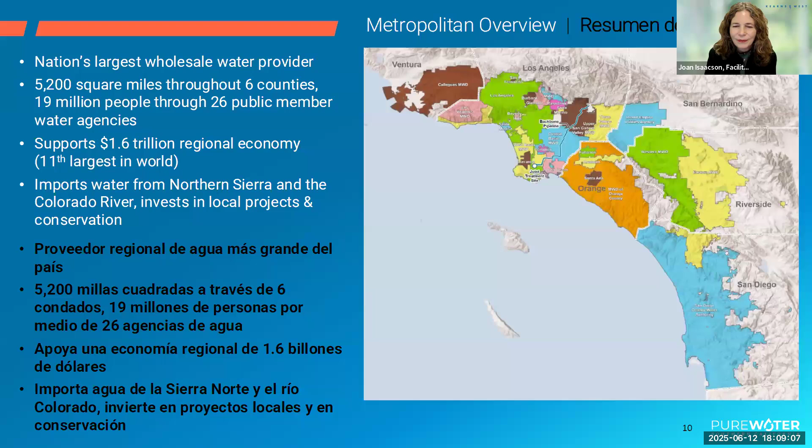All right, John, I think I've gone through all the preliminaries, over to you to start the presentation. Thank you, Joan, for those introductions. Good evening, everyone. On behalf of Metropolitan Water District and the Sanitation Districts of Los Angeles County, I'd like to welcome you to this virtual public meeting for the Pure Water Environmental Impact Report.

This is our second public meeting. We'll be having one more virtual meeting this coming Saturday. Derek and I are going to start by giving you a little bit of an overview of each of our organizations. Metropolitan Water District is the nation's largest wholesale water provider.

What does it mean to be a wholesale water provider? Metropolitan does not sell water to individual customers. We have 26 customers, which are our member agencies. Those member agencies then distribute water to approximately 19 million people in Southern California, ranging from Ventura in the north down to San Diego in the south, from the Pacific Ocean on the west out to the Riverside and San Bernardino area on the east.

We're supporting a very large economy in Southern California. Some of you may be aware that Southern California has the world's 11th largest economy, so it's a very important economy that depends greatly on not only Metropolitan Water District but our 26 member agencies to do their job every day to bring water into this region.

Our mission to date: we were formed in 1928, originally to import water from the Colorado River. Then in the 1970s, we supported the State Water Project and the state of California by taking deliveries from the State Water Project from Northern California. Over time, we've also invested hundreds of millions of dollars in local projects to support the development of water locally in Southern California. Let's go to the next slide.

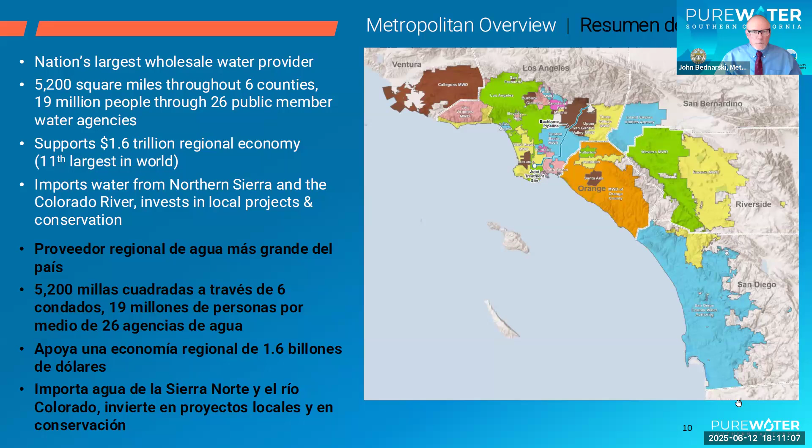As I mentioned, Metropolitan is a wholesale water provider. We own and operate the Colorado River Aqueduct, approximately 240 miles long, from the Colorado River, that was placed in operation in the early 1940s.

That was our core supply until the early 1970s, when the state of California developed what we call the State Water Project, that brings water from Northern California through a 350-mile long aqueduct into the southern portions of the state. Metropolitan is the largest contractor on that system.

We get approximately 30% of our water supply from the State Water Project, approximately 20% from our own Colorado River Aqueduct. And the remaining 50% of our water supply, I'm happy to report, is actually locally sourced.

It's very important to locally source water, and we're very fortunate to have this large abundance of local water supplies. We have very good groundwater basins that we use as large storage reservoirs. Many of our member agencies take deliveries from Metropolitan and store that water in these groundwater basins and produce that water as pumped water later on.

We also rely on snowpack in the local mountains and rainfall to recharge those underground aquifers. San Diego also has a seawater desalination plant that counts as a local supply. So we're very fortunate to have those local supplies.

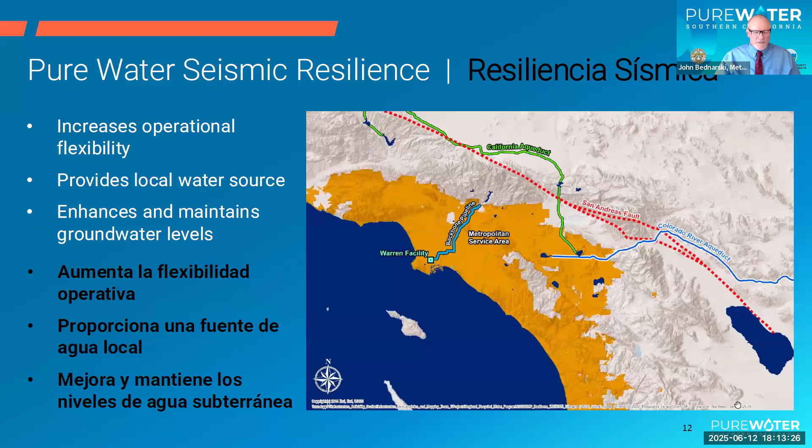I think this program, honestly, is the story of two agencies that have come together with a similar vision to develop a resource that is currently going out to the Pacific Ocean, and in turn produce a water supply that is of high quality and reliable for the region. This is a story of two very large agencies that have historically done their missions very successfully and are now embarking on a very important partnership as we move forward to maximize water recycling in the region.

At this point, I'm going to turn it over to Derek Zondervan to talk about the sanitation districts of Los Angeles County.

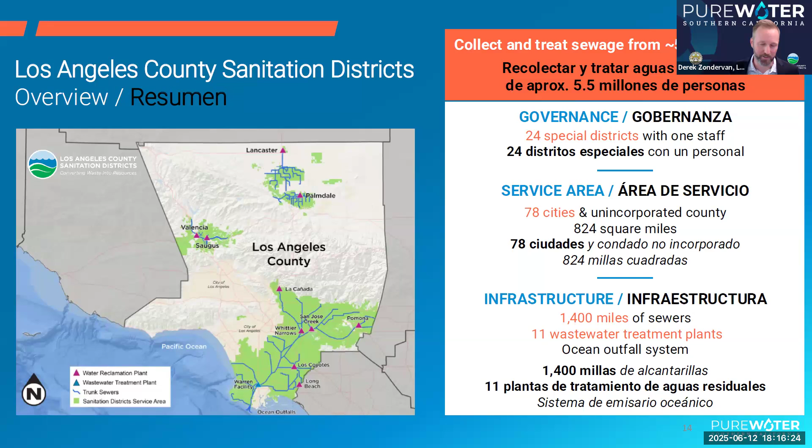But we're hoping to change that with this project, because the site of the proposed Pure Water Southern California Advanced Water Purification Facility is at the Warren facility. So if I could jump to the next slide, please.

Okay, this is an aerial view of our Warren facility, and the treatment plant is outlined in orange. As I mentioned, it's located in the city of Carson, along the east side of the 110 freeway. You can see that in the background there. Sepulveda Boulevard is the closest exit. And this facility currently treats about 250 million gallons per day of wastewater.

Historically, the wastewater of this plant has been too salty for reuse, so we consider this our largest untapped source of clean water for reuse within our system. But now with the Pure Water Southern California treatment facilities, we can finally make use of this very valuable resource. As far as the treatment process, you're going to hear a little bit more about that a few slides from now.

So the proposed location for the advanced water purification facility is outlined in the light blue. That's a 52-acre site that we, the sanitation districts, purchased a few decades ago to act as buffer property for the Warren facility. It provides separation from the treatment facilities and the neighboring community. This is really an ideal location for the advanced purification facility, not only because it's vacant and available, but also it's right next door to the source water at the Warren facility that's going to supply the new treatment facilities.

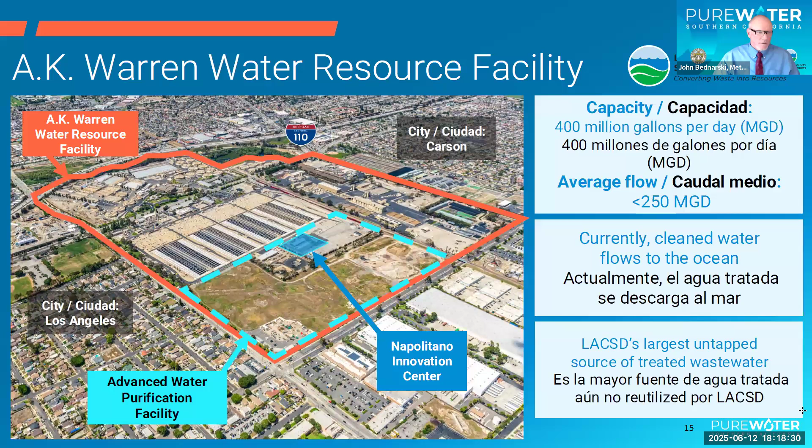Thank you very much, Derek. When it comes to water supply reliability and resiliency in Southern California, the impacts of climate change are very real. There's less snow in the local mountains, less snow in the Sierra Nevada, and less snow in the Rockies. More fires, as has been evidenced by the horrific fires that impacted Southern California earlier this year. And then we're sometimes stricken by dramatic increases in flooding, and the dry years are likely to get more often and also drier.

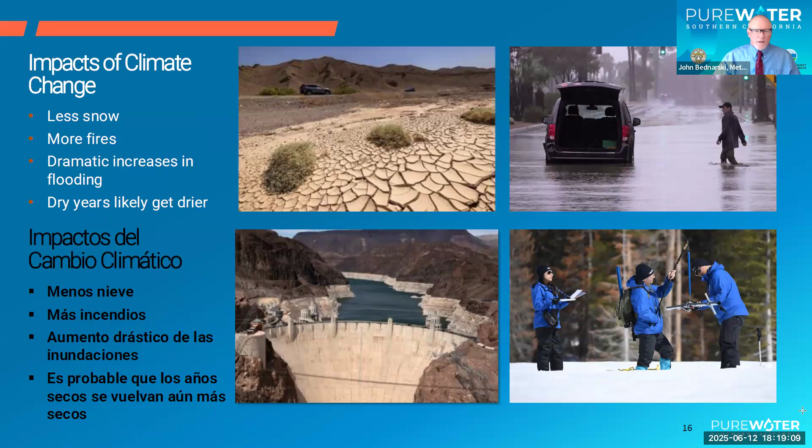So Metropolitan's response to this sort of unsure future going forward as far as water supply is concerned is to develop what we call a climate adaptation master plan for water. This is a plan that has been recently approved by our board of directors with two primary pillars. One is to develop a vision and a plan for ensuring water supply reliability. The second pillar is to develop a plan to ensure financial stability and sustainability for Metropolitan as an organization as we move forward through these challenging times.

As far as water supply reliability, this is where the Pure Water program fits in, in order to give us a drought-proof supply of water going into the future. But we need to make sure as we're making these investments that we're able to maintain affordable water rates, that we're making sound investments, not building infrastructure that will ultimately become stranded and not used, looking for opportunities to do project cost sharing with project partners, and also establishing regional partnerships like the one that you've heard about between Metropolitan and the sanitation districts.

Additional goals of the Climate Adaptation Master Plan for Water include increasing the resiliency and the reliability of the water supply for Southern California, increasing the amount of local supplies that are used and being able to lessen our reliance on imported water supplies, providing greater flexibility of our delivery systems to move water from one location to another that was never envisioned by the original designers and builders of Metropolitan's system. And, like I mentioned on the previous slide, ensuring that there's equitable access to affordable water for all people. So taking cost into consideration as we develop this new program is of paramount importance to the project team and to both of our organizations.

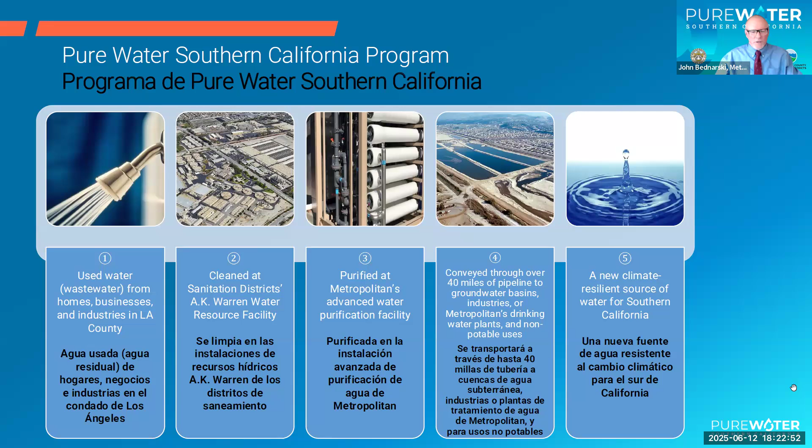The water will then be conveyed to its ultimate destination, and this conveyance system will include approximately 40 miles of pipelines, pump stations, groundwater spreading facilities, as it makes its way either to industries, groundwater replenishment uses, or perhaps as we fully build out the system into Metropolitan's own water treatment plants for retreatment and then distribution into our existing potable water or drinking water system. It's going to be a new climate resilient supply for Southern California, as I've mentioned a couple times before.

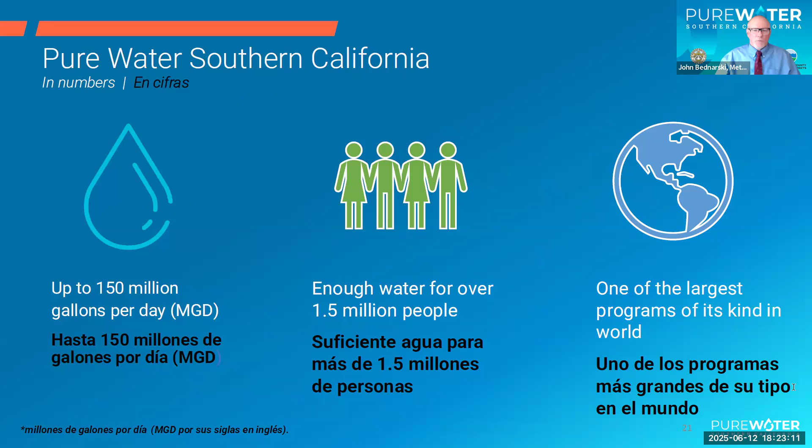As described in the environmental document that's available to all of you, the maximum build out of this project is 150 million gallons per day. It will be one of the largest projects of its kind in the world and will provide enough water for 1.5 million people within Southern California.

Let's talk about some of the benefits of the program, and we've really broken these up into three different tiers. One is the water supply benefit. It's a sustainable supply of water, whether we're in drought conditions or had a bountiful winter of snow that's run off and been collected into our aqueducts. This water will be available 24/7, 365 days a year. It will thereby increase water resiliency to Southern California, allow us to replenish groundwater basins, and as I've said before, will create a new local supply of water.

There's also environmental benefits from this program. This purified source will enhance water quality, especially in the groundwater basins, as it's used as a source to replenish those basins. We'll be using the largest untapped source of wastewater in the region. Other projects similar to this are currently in the planning or development stage, and they will also be coming online in the not too distant future. But collectively together, this program will allow us, Metropolitan, to reduce its reliance on imported supplies.

Finally, there's economic benefits from this program, and I'll go into some of the details in future slides, but suffice to say, this $8 billion program will fuel economic growth and will also generate jobs, not only during construction, but long-term operational jobs, both at Metropolitan and at the county sanitation districts.

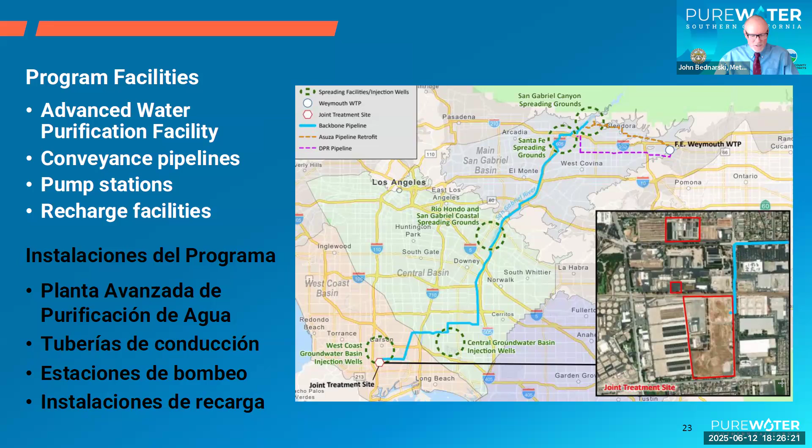Pure water provides additional benefits to the region, but these are not specifically quantified in the programmatic EIR. They are covered, but not quantified. Some of those additional and supplemental programs benefiting from the Pure Water program include Metropolitan's Climate Action Plan, the Climate Adaptation Master Plan, the goal to develop sustainable infrastructure, providing community benefits and improvements to the region and in the neighborhood of the facilities that are going to be built.

Let's talk about the workforce development initiatives that Metropolitan is including with this program. First is an important project labor agreement adopted by Metropolitan's board several years ago. At the time this agreement was negotiated with the labor unions, it was agreed to include all aspects of the Pure Water program within it. This project labor agreement will ensure that wages paid to all construction workers on this program are prevailing wage levels, and that there will be use of local labor force and development of apprenticeship opportunities.

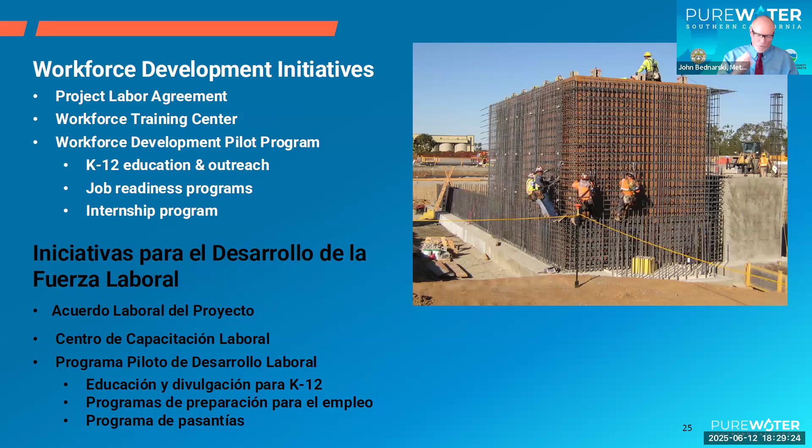Metropolitan recognizes the importance of developing outreach to our communities. It's through community support that we will get acceptance of this program as we design, construct, and operate it. Metropolitan is continuously conducting tours, presentations, and other types of events to draw the public in and teach them about the importance of this program and the benefits of purified water for this region. This information is available on Metropolitan's website, through our social media channels, occasionally in the news, and in all the different multilingual materials being produced. I would direct you to Metropolitan's website for easy access to a lot of these tools.

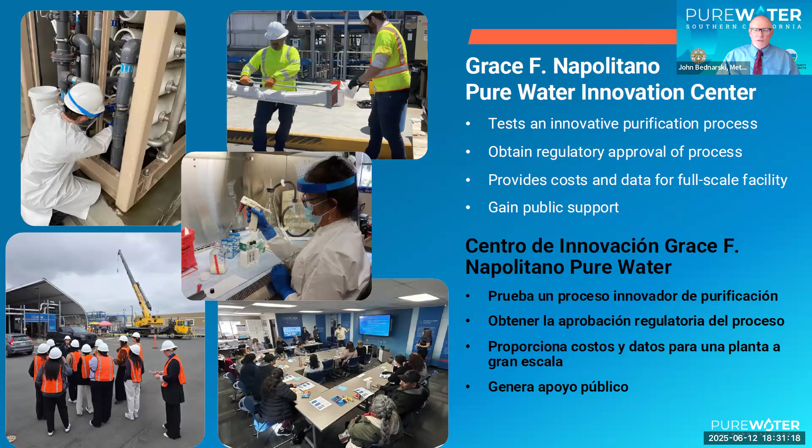The program's development took place on a solid foundation of applied science and engineering, starting with the development of the Grace Napolitano Pure Water Innovation Center. This represents approximately $20 million investment by Metropolitan and the sanitation districts to bring this testing facility online in 2019. At this location, both organizations are able to test the innovative purification process planned for the Pure Water program. We're using it as a platform to obtain the regulatory approvals necessary to operate the treatment process that will produce the water. We're also getting important information from the testing ongoing now as far as the cost for the full-scale program. Finally, we're using this facility to gain public support by conducting countless tours through the facility.

When we embarked upon this program in the mid-2000s, there wasn't a lot of science that existed in the area for the treatment processes we envisioned. So we first looked outward, going to Australia, building upon research done there on the type of treatment process we were envisioning. But then we did a lot of this cutting edge work at the Napolitano Center ourselves over the last 5 to 6 years. Through that process, we've been able to develop confidence in the water treatment process we'll be using to purify the water.

So what are those processes? Let me start first with the AK Warren facility. A number of improvements will be made to that facility, but probably most important is the sanitation districts designing and constructing the first step of the treatment process, or what we refer to as the pre-treatment process for the advanced purification process. This involves introducing membrane bioreactors into the AK Warren treatment facility. A portion of that facility's secondary treatment process will be converted to the membrane bioreactor process to provide enough pre-treated water to go on to Metropolitan's advanced purification facilities.

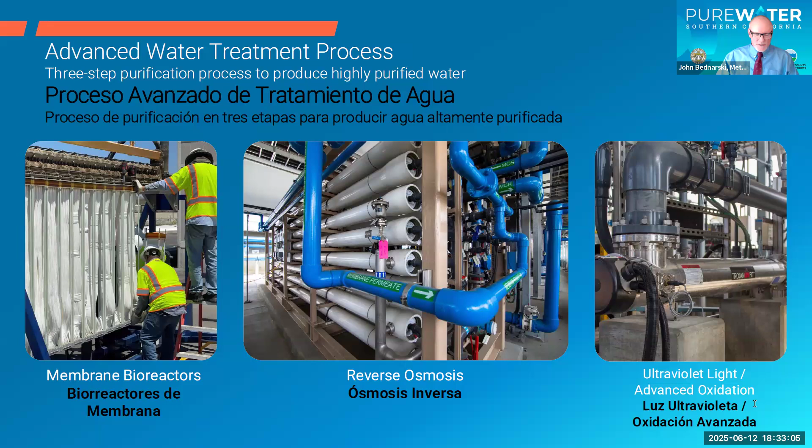A lot of this testing took place at the Napolitano Innovation Center. The key goals of the testing program, beyond pure scientific development, were to allow for transparency of the work we were doing, both for regulators and the general public. We also wanted to use the Napolitano Center to seek feedback on our testing programs, and finally to share the data with the reuse community, the regulators, and the general public.

This testing program has been ongoing for approximately 10 years. While the Napolitano Center has been in operation for about 5 years, it's been testing large scale, or full scale, components of an advanced treatment system. We've had an ongoing arrangement with an independent science advisory panel to advise us on the types of tests we should be doing, how the Napolitano Center was developed, and how to move forward with gaining regulatory approval. We first brought the regulators on board about 10 years ago with our initial meetings to talk to them about the effort we're about to undertake.

We've continued to include regulators throughout the entire process. We feel that we are on track to meet the state's expectations and the regulatory requirements necessary to produce purified water for the uses intended under this program.

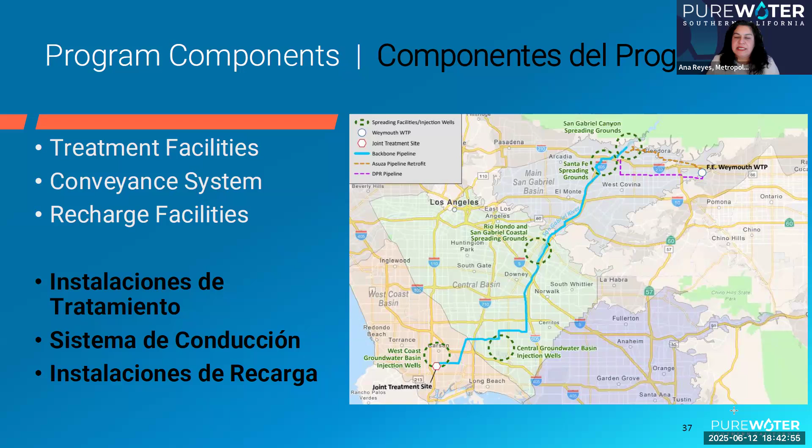Some other topics, like agriculture or forestry resources, were also reviewed, but they were found not to have the potential for significant impacts. Those are covered in a separate chapter of the report called Environmental Effects Found Not to Be Significant. If you think we are missing a topic, it is likely in the Effects Found Not to Be Significant chapter.

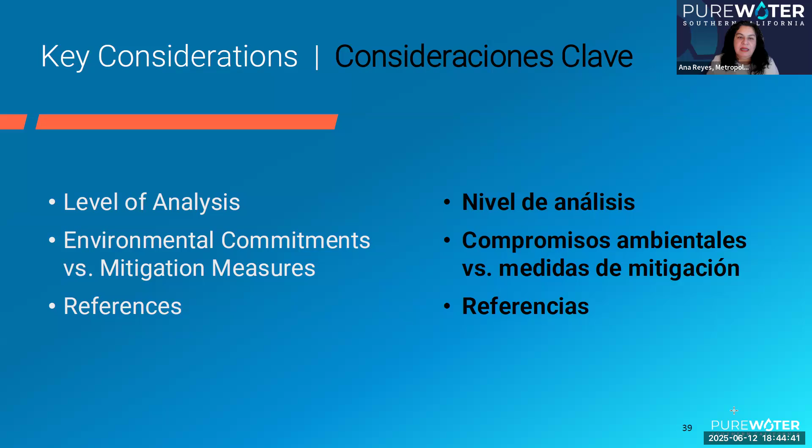Key considerations. As you review the EIR, there are a few helpful things to keep in mind. First, you should note the level of analysis—some parts of the project are studied in more detail than others, depending on the level of information we have for the various components. Second, there's an important distinction between environmental commitments and mitigation measures, which I'll discuss. Finally, if you're looking for more details, the references and appendices are included at the end of each chapter or resource section, and we've also made all of those available on our website so you can easily find them.

The level of analysis is the first thing to consider. Because different parts or components of the program are at varying stages of planning and design, we took a combined approach in the EIR, looking at it from both a program level and project level perspective to assess environmental impacts. At the program level, the EIR provides a broader overview of the entire program, especially for components where only conceptual information is available. Components included only in the program level analysis would require more detailed site-specific environmental assessments as designs are finalized.

For components that already have enough design and technical detail, the EIR includes a project level analysis, which is a more in-depth evaluation of potential impacts. When you get to the section covering environmental resource categories, such as biological resources, you'll see a chart at the beginning of each section identifying which components were analyzed at the program level and which were analyzed at the project level. We used this combined approach to ensure a comprehensive analysis of the entire program, even with varying levels of detail for the different components.

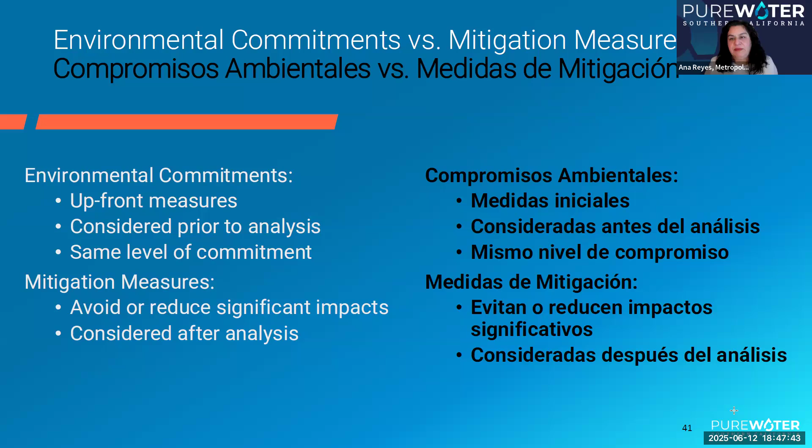That's where the second approach comes in: mitigation measures. These are additional measures we propose to reduce or avoid significant impacts identified during the environmental review, and you'll see them described after the analysis section. One more important item to note is that all environmental commitments and mitigation measures will be incorporated into the Mitigation Monitoring and Reporting Program, or MMRP, for the project, which will make them fully enforceable under CEQA if the project is approved.

The first is air quality. To be conservative, we modeled a compressed construction schedule with overlapping work in case the schedule would allow for this. Although this approach overstates the actual air quality impacts we're anticipating, we were still able to reduce impacts to less than significant levels by implementing environmental commitments and mitigation measures, with the exception of carbon monoxide. Carbon monoxide emissions could exceed the threshold, but really only during short-term peak or the busiest construction periods. However, it's important to note that the region already meets state and federal standards for carbon monoxide.

This particular air pollutant is not a significant problem. However, to err on the cautious side, we identified this impact as significant and unavoidable.

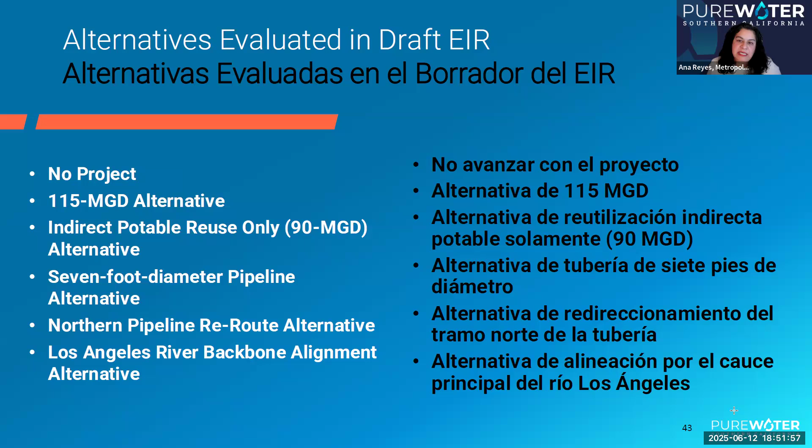Under CEQA, an EIR has to look at what we call a reasonable range of alternatives to the proposed project, including a no project alternative. The slide you're seeing shows the different alternatives that were evaluated in the EIR. These include options like reducing the amount of water to be purified, changing the size of the pipeline, using different treatment options, or adjusting the pipeline's alignment. The goal of exploring these alternatives is really to see if there's a way to avoid or reduce significant environmental impacts while still meeting most of the program's objectives. You'll find a full discussion of each of these alternatives in the alternatives chapter of the EIR.

Okay, let's discuss comments. Next slide. Tips for writing. Uh-oh, is that the right one? Yes, sorry, I might be on the wrong slide. Can you go back? There we go, sorry about that.

As I touched upon earlier, this public review and comment period is your chance to take a look at how we evaluated the environmental impacts, both during construction and during long-term operation, and how we've proposed to reduce those impacts. Your review can help make sure the analysis is thorough and that all potential impacts are considered and addressed. If you have a question or comment, please state it clearly so that we can address it as thoroughly as possible in the final EIR. If we're not certain what you're asking, we may not be able to address the question as directly as you'd like.

To submit your comments, we've developed 3 options, and these options are also described on the Pure Water website in case you can't write them down right now. The first option is via email to our environmental planning section at ep@mwdh2o.com. For this option, we ask that you please include Pure Water draft EIR on the subject line to ensure our team receives your email. The second option is through our online portal on the Pure Water website. It's really simple, actually. If you go to the website and open the portal, there's a form that you can just fill in and submit your comments, and we will get them immediately. The third way is through US mail addressed to me.